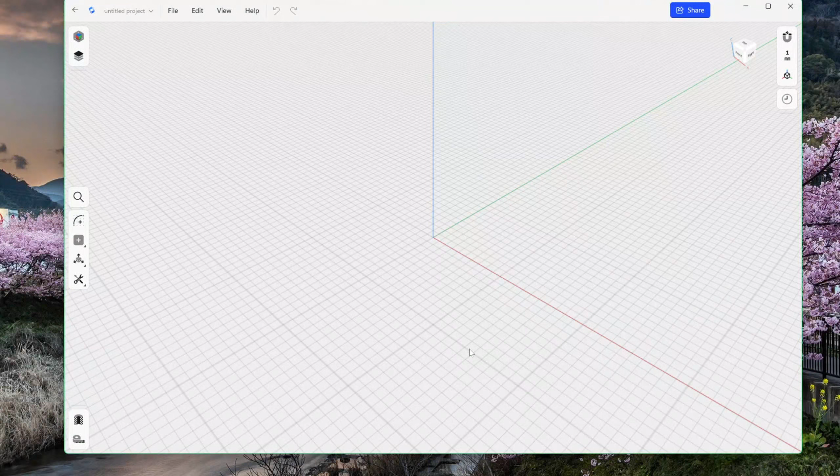First, let's start with a sketch. Click on Sketch here and select this bottom plane. This will put us into the top view. Now go over here and select Circle.

Place the circle in the center of your sketch and make it as wide as you want your cutting result to be. So if you make this 20 mm, the circle you will cut out of the clay will be 20 mm. So I will make this 20. To end the function, click Escape.

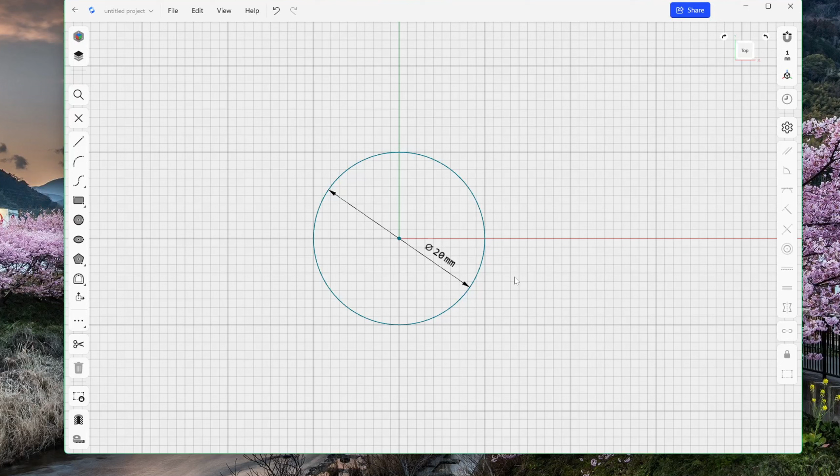All the cutters I designed have three profiles. The first one will be the cutting edge, which is 0.4 mm. The second is the support, 0.8 mm. And the third one is the handle, 3 mm. So we have to create three offsets of this outline, and I will show you how to do it.

Go over here and select Offset Edge. Select this contour and drag it out and enter 0.4 mm. And now select the inner contour again, drag it out and make this 0.8 mm and enter. And the last time select the inner contour again, drag it out and enter 3 mm.

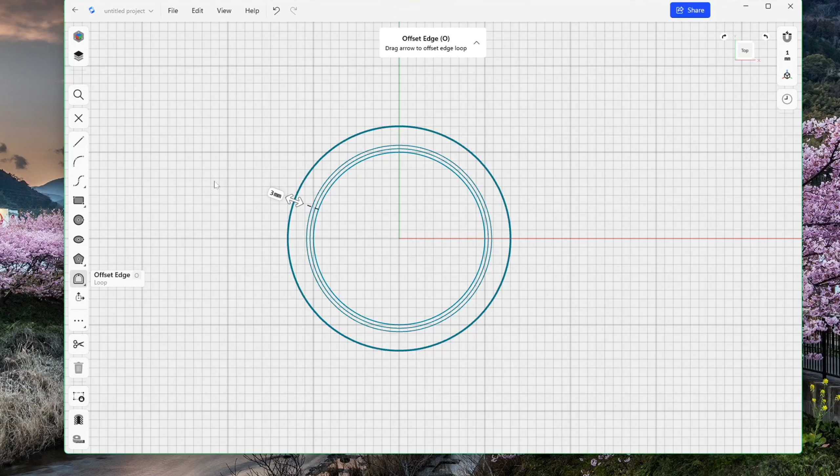So these are the three profiles we will need. This will be our cutting edge, this will be our support, and this will be our handle. The next step is to extrude these three. So finish or exit your sketch. Go over here to the cube and rotate it. You can also use Shift and your mouse to rotate your view.

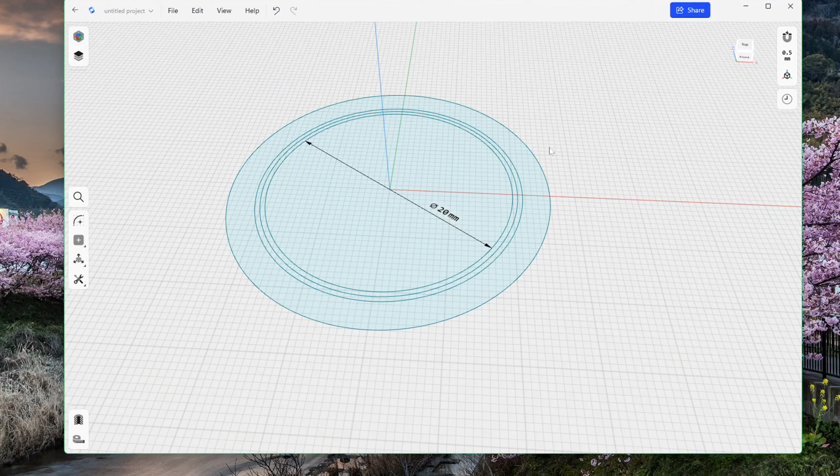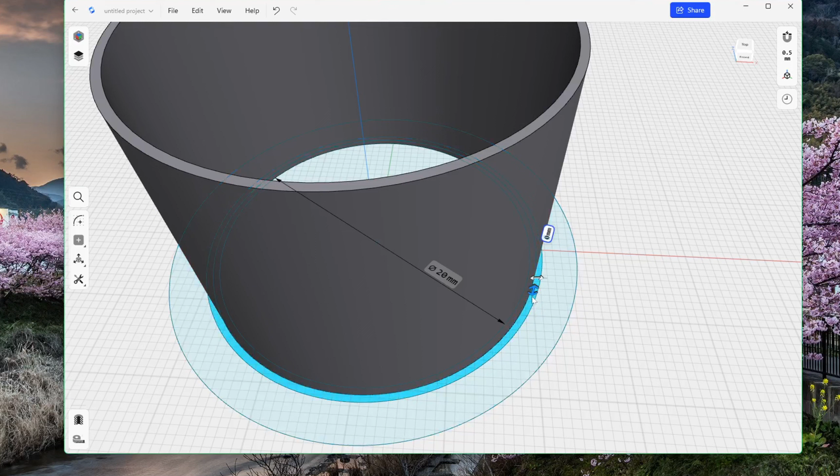To extrude your profiles, zoom in. Click within these two lines here until you see the darker blue. Now this little arrow will come up and you can drag it out and enter 15 mm. Like this. Do the same again with the second contour here. Drag it out and enter 10 mm. Like this. And the last one will be 3 mm.

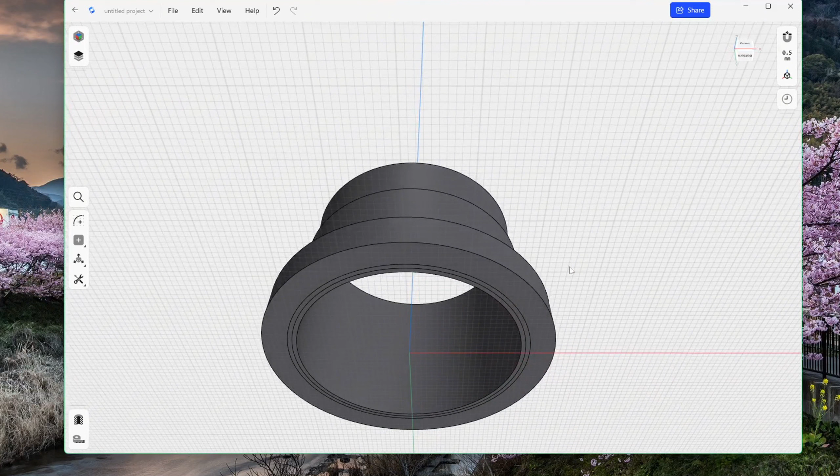If you rotate this view, you will see that these are three separate bodies. If you would print them like this, the printer or the slicer software would most likely separate them, so print this circle and this circle separately, which is not what we want. So go over here to Items. And here you can see all three bodies.

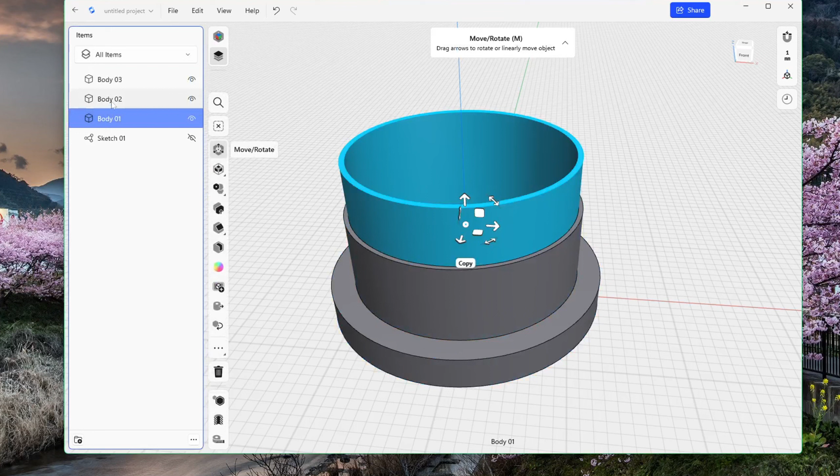Press Ctrl on your keyboard and select them all, and then go over to Union. And make sure Keep Originals is off, and click Done. Now we only have one body. This is perfect for printing. And that's it. You successfully designed a simple circular clay cutter in Shapr3D.

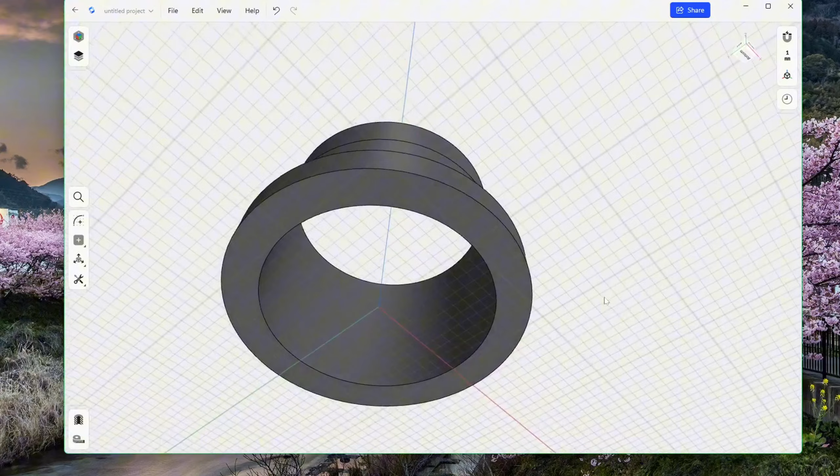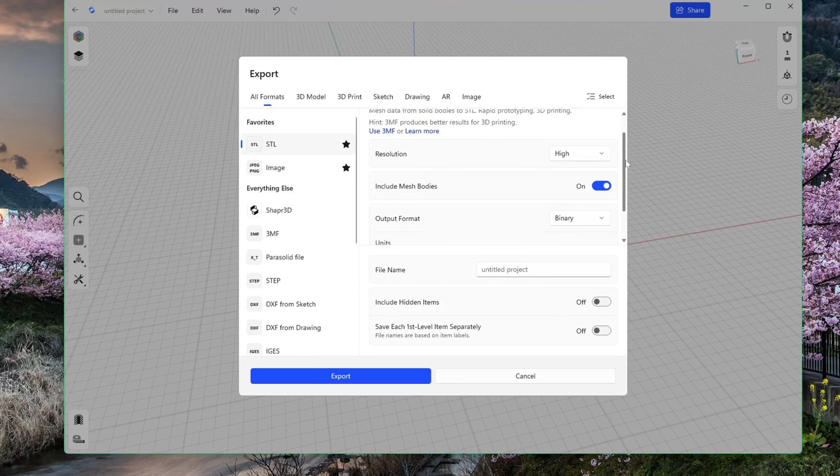The last step you have to do is to export it for 3D printing. So go over to Share, Export, Export Project, and select STL. I have it here in the favorites, but otherwise it would be under here. I don't change any of the settings. Export and save it on your computer.

And that's it. You successfully designed a simple circular clay cutter in Shapr3D. This project is a great way to practice the basics of sketching, dimensioning, and extruding, and it's a perfect foundation for creating more complex shapes in the future. In the next episode, we will take this design a step further and make something a bit more complex.